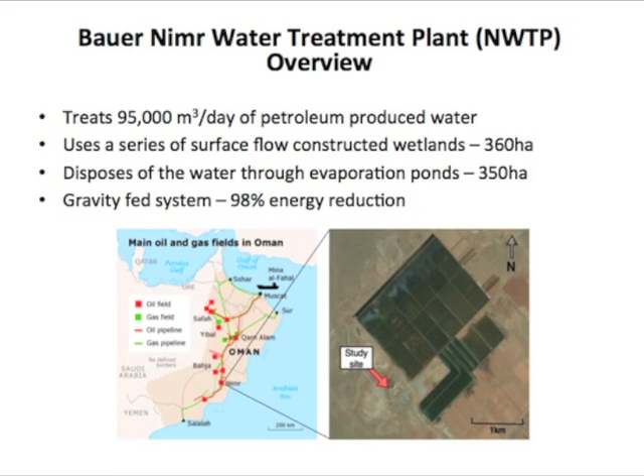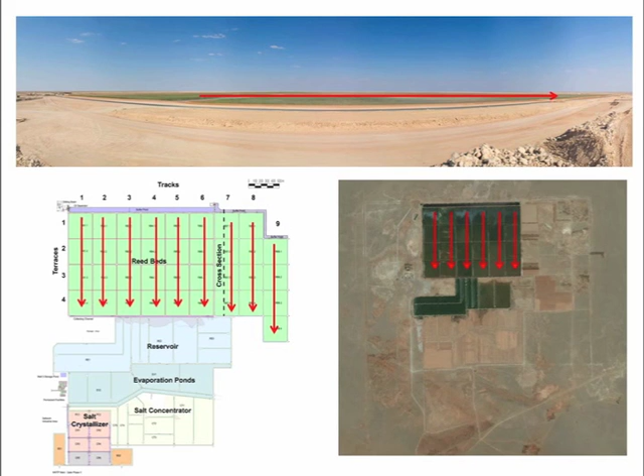Produced water enters the system via a pipeline before going through an oil and water separator pictured here. The produced water is passed through the stilling basin and series of cyclonic oil separators where a majority of the oil is removed. The water is then channeled down a buffer pond for distribution into the wetland through 9 parallel surface flow wetland tracts, each of these tracts consisting of 4 terraces. The average hydraulic residence time of the wetland is 4 to 5 days. Once the water has been treated by the wetlands, it finally enters the reservoir, evaporation ponds, and saltworks facility used for salt recovery.

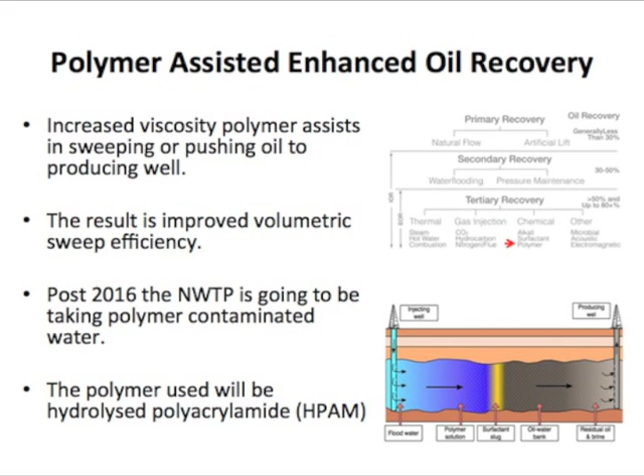Post-2016, the Nimr oil fields will start using polymer-assisted enhanced oil recovery using hydrolysed polyacrylamide, what is commonly known in the industry as HPAM. For this reason, Bauer Nimr needs to know what effect the polymer-contaminated water will have on the wetland treatment plant.

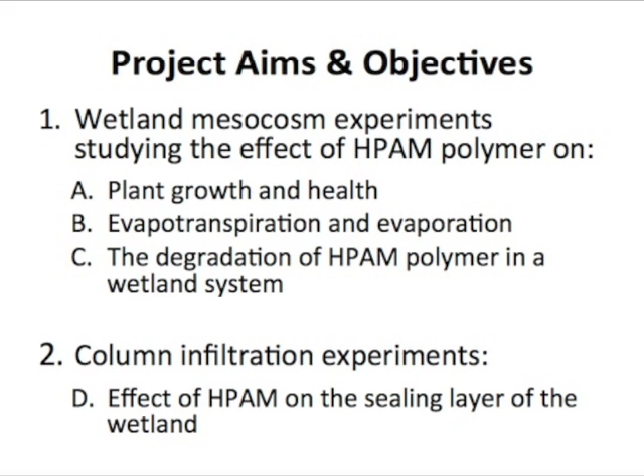This slide shows a brief overview of the aims and objectives of the study. The study will be split up into 2 parts. The use of wetland mesocosms to study the effects of the HPAM polymer on the wetland plant growth, health, evapotranspiration, evaporation, and the degradation of the HPAM polymer in the wetland system. The second part of the experiment will use column infiltration experiments to study the effect of the polymer on the infiltration rate of the mineral sealing layer used in the wetland.

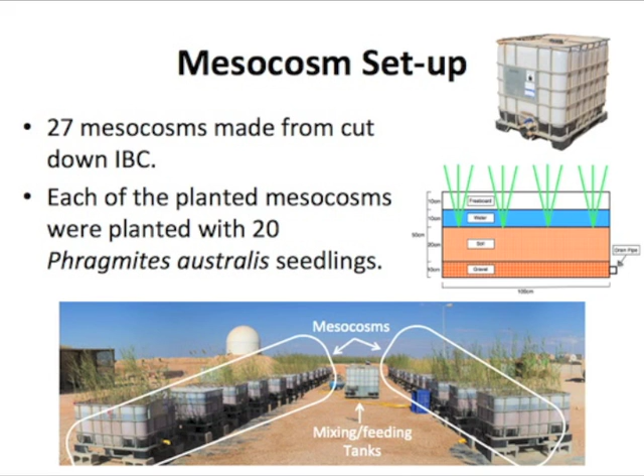The operation of the mesocosms was done differently depending on which treatment. The effect of a constant polymer concentration was done on a weekly batch load system. This meant at the end of each week the mesocosms were drained and then filled up with their respective polymer concentration. 20 milliliters of Nimr crude oil was also added.

The mesocosms that were used to study the effect of a single dose of polymer on plant health were run on a single 8-week treatment. That meant at the start of the study, a single respective polymer concentrated solution was added to the mesocosm and a single 20 milliliter dose of Nimr crude oil. Every 2 days, the water loss from each mesocosm was measured from a marked datum and topped back up with water.

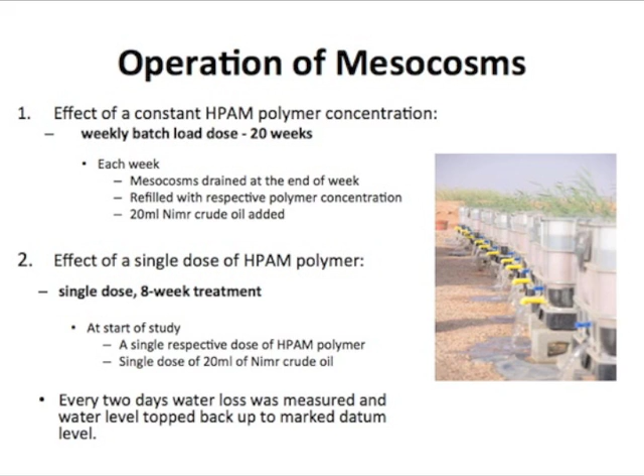The sampling parameters of the mesocosms are as follows: water loss due to evaporation and evapotranspiration, plant health and growth. This was done by putting 5 randomly placed quadrats into each planted mesocosm and measuring shoot height, done by measuring all shoots in each quadrat, and shoot density, by counting the amount of shoots in each quadrat.

Another plant health parameter was leaf health, and was measured on the young newly formed leaves and the aging older leaves. This was done by simply measuring the percentage of green, live leaf to brown, dead leaf. This browning of leaves is termed necrosis, and the complete death of a leaf is termed chlorosis. Leaf nutrients and trace elements were also analysed by an external laboratory at the end of the study for elements such as nitrogen, phosphorus, and boron, etc.

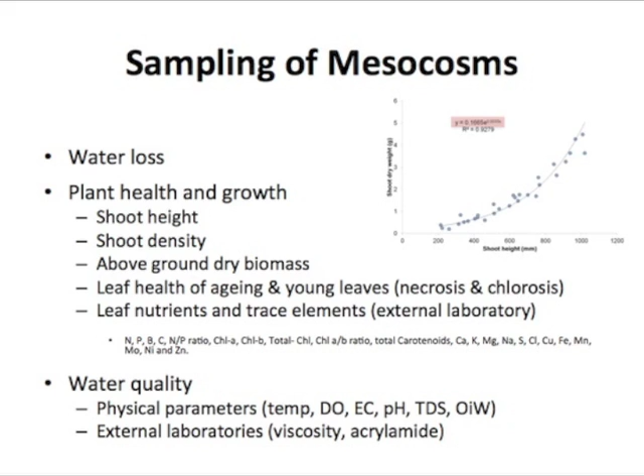Physical water parameters were also measured regularly, as well as sending samples to an external laboratory to analyse viscosity and acrylamide concentration. The measurement of viscosity is one way to indirectly measure the amount of polymer in a solution, and the acrylamide concentration relates to the potentially toxic breakdown product of the HPAM polymer.

Although the average measurements across the mesocosms show this trend, there was a large variation between replicates, meaning that when a one-way ANOVA test was done, it showed no significant difference between the treatments. This increased growth in some of the polymer treatments was most likely due to the increased nitrogen from the HPAM polymer addition.

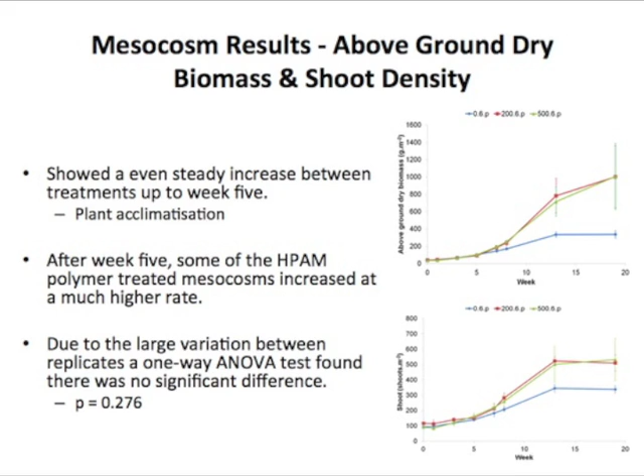If we have a look at the HPAM polymer chemical structure, we can see that it has nitrogen in the form of NH2. It is believed that the increased growth was due to the plants utilising this nitrogen as a fertiliser in an otherwise nitrogen-lacking environment.

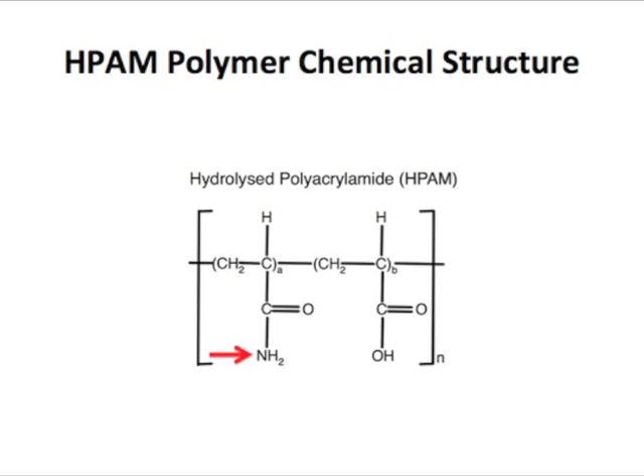This slide shows the results of the necrosis and chlorosis of the leaves. The top graph shows the percentage amount of dead leaf on the young, newly developed leaves, and the bottom graph shows it for the aging older leaves. In terms of the young leaves, the polymer treatment showed higher necrosis than the no polymer treatment, staying relatively steady over the study period.

In terms of the aging leaves, there was a steady increase in necrosis in all treatments, although the polymer treatment showed much higher rates, as high as 85% of aging leaf necrosis over the 6-week period in the 500 ppm polymer treatment.

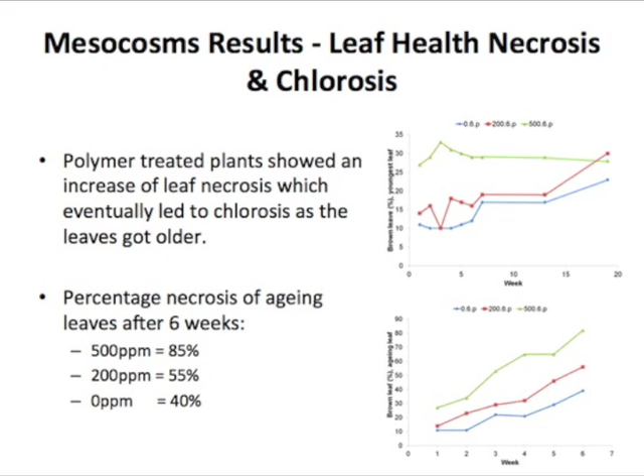Some answers as to why this necrosis and eventual chlorosis occurred can be found in the leaf nutrient and trace element results from the external laboratory. All of the polymer-treated plants showed an increase in potentially toxic chemicals such as boron, manganese, copper, molybdenum, nickel, and zinc. This can be seen by comparing the values of the no polymer treatment, highlighted in red, to the polymer-treated plants, highlighted in blue.

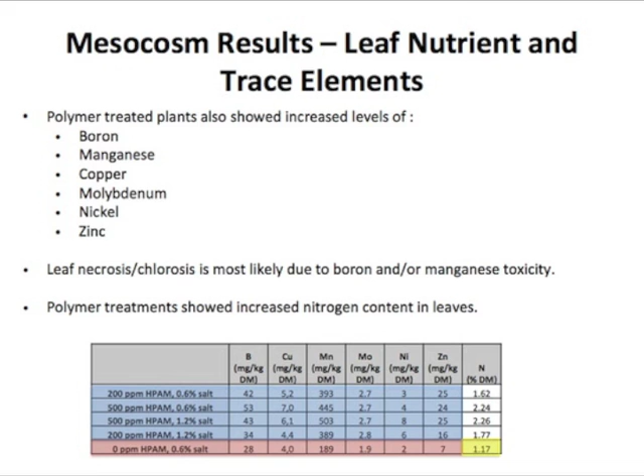The leaf necrosis and chlorosis was most likely due to boron and/or manganese toxicity, as browning and yellowing of the leaves is a common symptom. Why the polymer-treated plants had an increased uptake of these potentially toxic chemicals is unknown and requires further study. The nitrogen content of the leaves in the polymer-treated plants also showed an increase when compared to the no polymer treatment. This confirms the hypothesis that the polymer was a source of nitrogen for the plants.

In terms of the evapotranspiration and evaporation from the mesocosms, up to the 6th week, the general trend followed the on-site Class A pan. After this time, the polymer-treated planted mesocosms showed a much higher water loss than the no polymer treatments. This was due to these plants having increased biomass and therefore transpiring at a higher rate.

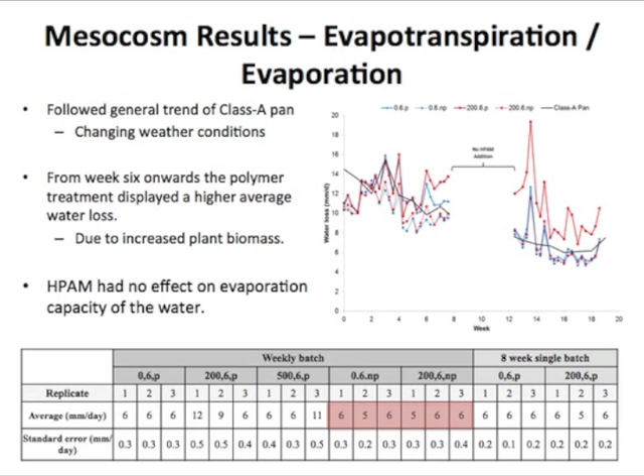By looking at the evaporation rates of the non-planted mesocosms, highlighted in red in the table, it can be said that the polymer had no effect on the evaporation capacity of the water.

This slide shows the results of the external lab measurements of viscosity, top graph, and acrylamide concentration, bottom graph, on day 0 and after 6 days of operation. The viscosity of the solution decreased over the 6-day period, suggesting that there was some degradation of the polymer. The acrylamide concentration also decreased over the 6-day period.

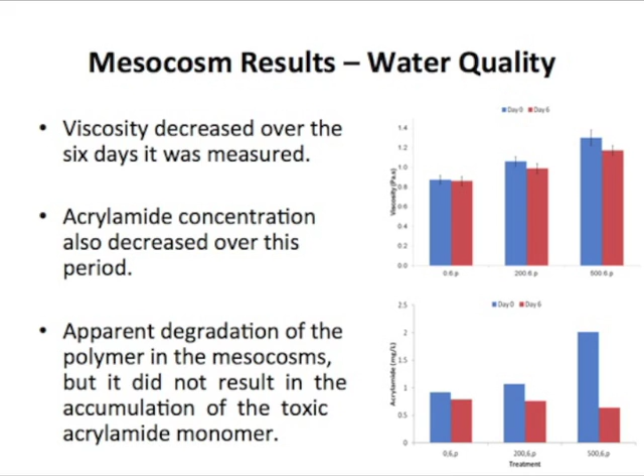This is an encouraging result given that there was some apparent degradation of the polymer in the mesocosms, but it did not result in the accumulation of the potentially toxic acrylamide monomer, a known neurotoxin, which is one of the potential breakdown products. Due to the large variation between mesocosms, in terms of above-ground dry biomass and evapotranspiration and evaporation, there was no significant difference between the treatments using a one-way ANOVA test. This was due to the small-scale nature of the experiments.

The observed increased growth in some of the plants was most likely due to the increased presence of nitrogen from the HPAM polymer. It was found that the polymer addition had no effect on the evaporation capacity of the water. The increased leaf necrosis and eventual chlorosis observed in the polymer-treated plants was likely due to the increased uptake of chemicals such as boron and manganese. It was also found that there was some degradation of the polymer, and this degradation did not lead to an increase in the potentially toxic acrylamide.

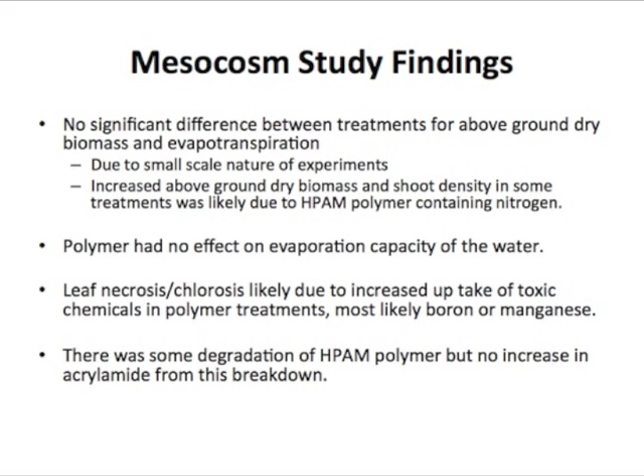The second part of my study with polymers was looking at what effect the addition of polymers had on the infiltration rate of the mineral sealing layer. This was done using a falling head permeability test, or FHPT. The experiment consisted of 12 PVC columns filled with compacted soil. The compacted soil was the same compacted material that is used to seal the main wetland. The test was undertaken in triplicate using 4 different polymer concentrations: 0, 200, 500, and 1000 ppm.

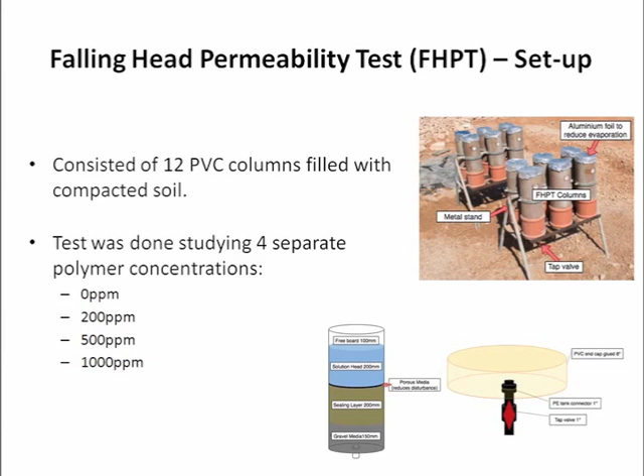The falling head permeability test operation was as follows. After compaction of the soil, a 5-day initial infiltration test was undertaken with clean well water to get a base infiltration rate. After this, the columns were filled with their respective polymer solutions and monitored for 6 weeks. After these 6 weeks, a final infiltration test was done using clean well water. Every morning of the study period, the amount of water loss was measured and the columns refilled with their respective treatments to maintain a 20 cm head.

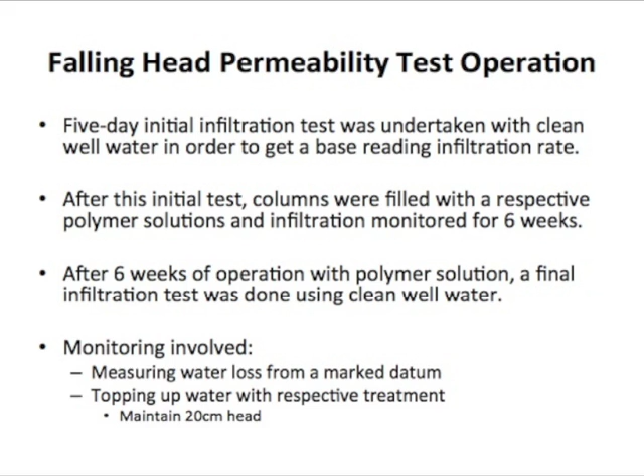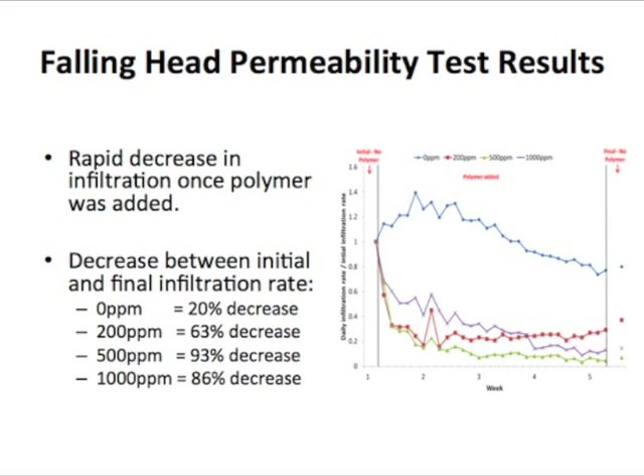The results of the falling head permeability test showed that there was a rapid decrease in infiltration once the polymer was added in all polymer treatments. That is, the purple, red, and green line in the graph. The blue line, which was the no polymer treatment, showed a 20% decrease in infiltration over the study period. This rapid decrease in infiltration of the polymer-treated columns was likely due to the polymer blocking up pores in the substrate, as well as the polymer solution having a higher viscosity than water and therefore moving slower down through the substrate.

Problems encountered during the experiment included not having equal initial infiltration rates. This was due to the method of compacting the soil not giving uniform compaction between the columns. Another issue was that there was a decrease in the clean water control infiltration rate, likely due to cracks opening up between the substrate and the PVC column due to heating and cooling by the sun.

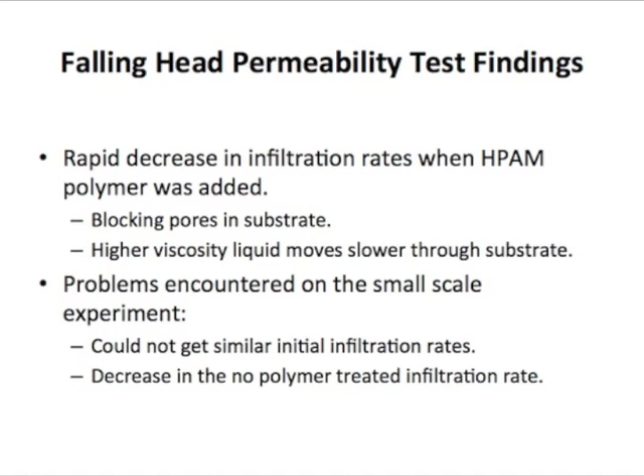The results from both of these experiments, the mesocosms and the falling head permeability test, are very encouraging for the Nimr water treatment plant, but there were also problems and issues encountered that need to be verified in future larger scale, longer term, more detailed experiments.

The system will look at the effect of polymer on a range of plant species including Phragmites, Schoenoplectus, Typha, and Juncus species. The effect of the polymer on the infiltration rate will also be studied further using a HDPE sealed wetland and comparing water loss to a wetland with a compacted mineral sealing layer.